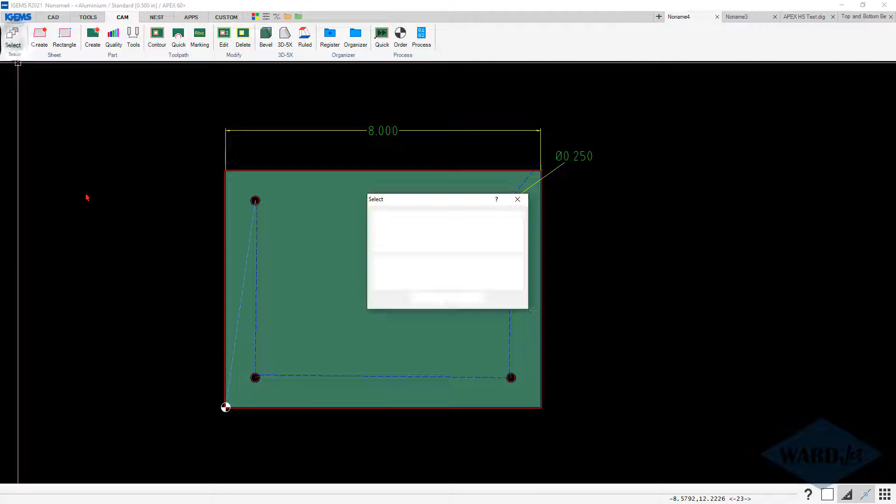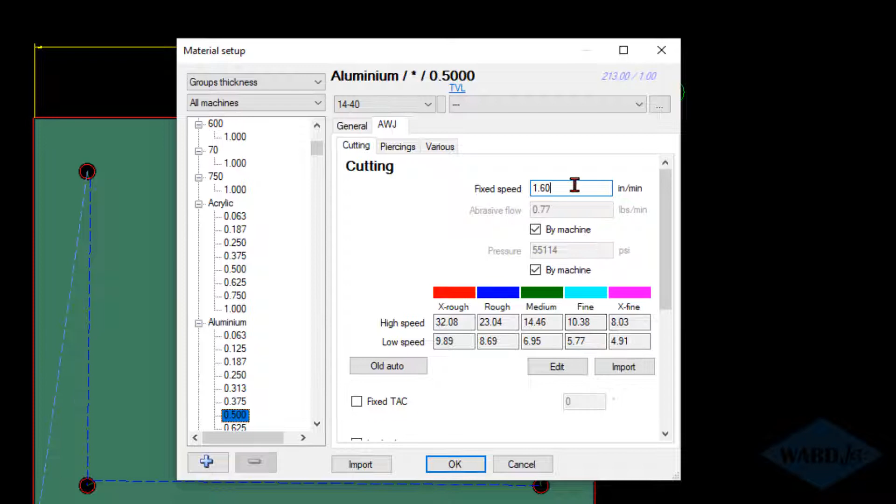If we go into the material and edit the material, we have this fixed speed field up here, which normally is set to 39.37 by default. So what I'll generally do is set this to about 20% of my extra fine speed, and I find that that gives me a pretty vertical cut. As you get thinner and thicker, that ratio might change a little bit, but it's a good place to start in the typical range that people are doing water jet cutting. So this essentially gives you a 6th quality to choose from.

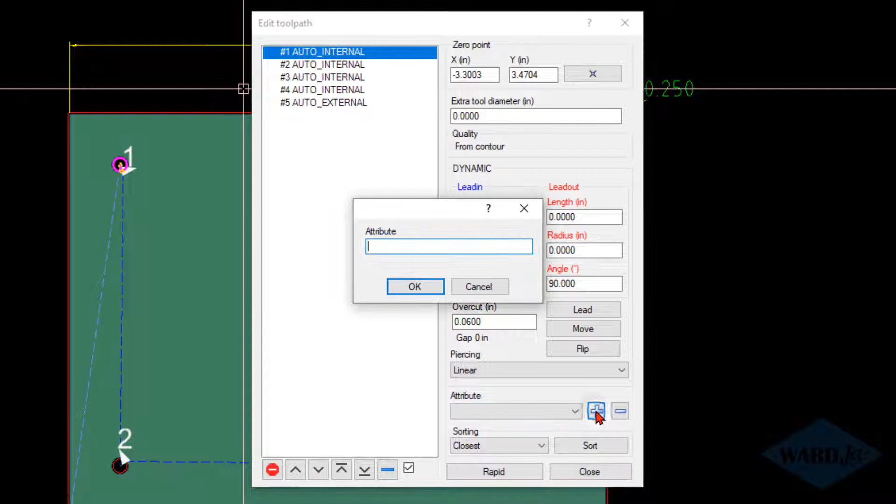And then if you actually want to use that, we've got our toolpath added here already. If we click on the edit button, click on the part, come down to the attribute area, and if it's not already there, which in this case it's not, you can click on the plus button here and just type uppercase FS, and it'll add that to that cut, and then you can do the same thing to the other cuts. So then once it's in that pull down list, you can choose that.

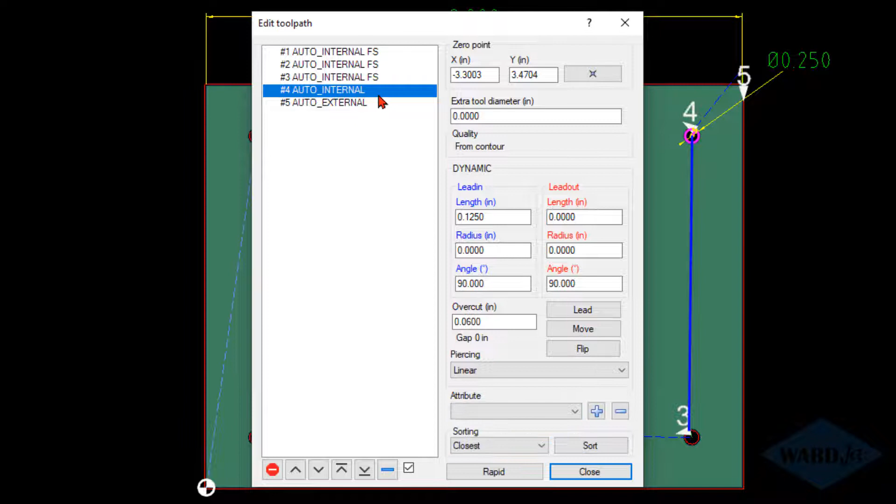If you decide that you want to remove one of these attributes, just hit the pull down menu and click on the blank field there, and that removes that attribute. And then we can, of course, put it back on again. You might also find as you cut these holes at the slower fixed speed that they're going to get a little bit larger because you are traveling so slowly.

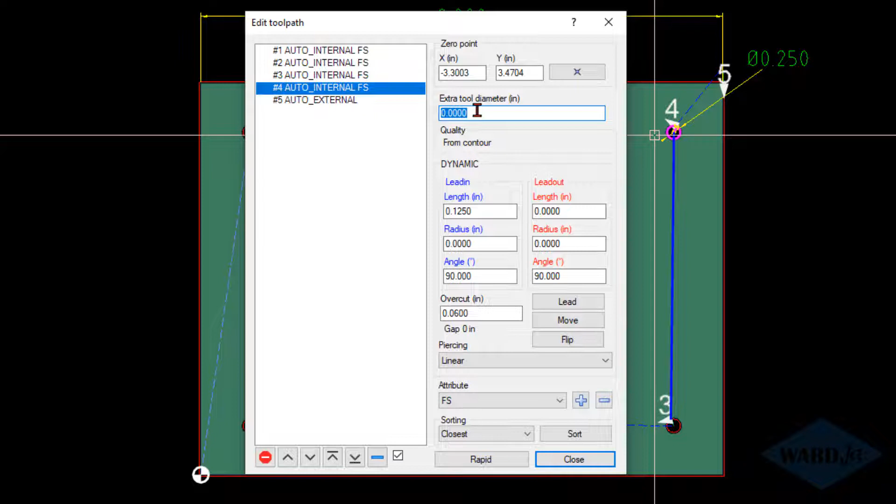So if that's the case, you can use this extra tool diameter field here to increase the tool offset on those holes. So if you cut the hole and found that it was 5 thousandths bigger, you can plug in 5 thou here, and if we zoom in on that hole, see that when I click out of that box, the toolpath moves in towards the inside to make that hole a little bit smaller by that amount. We can close this now. We can process this.

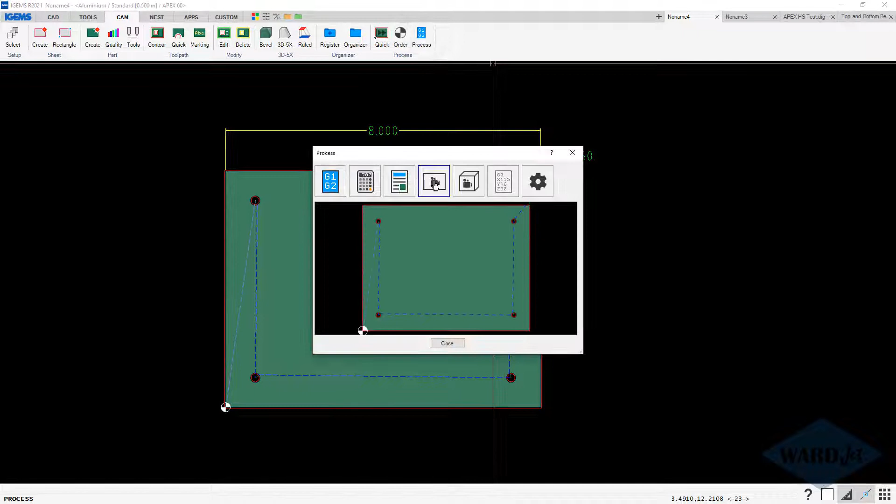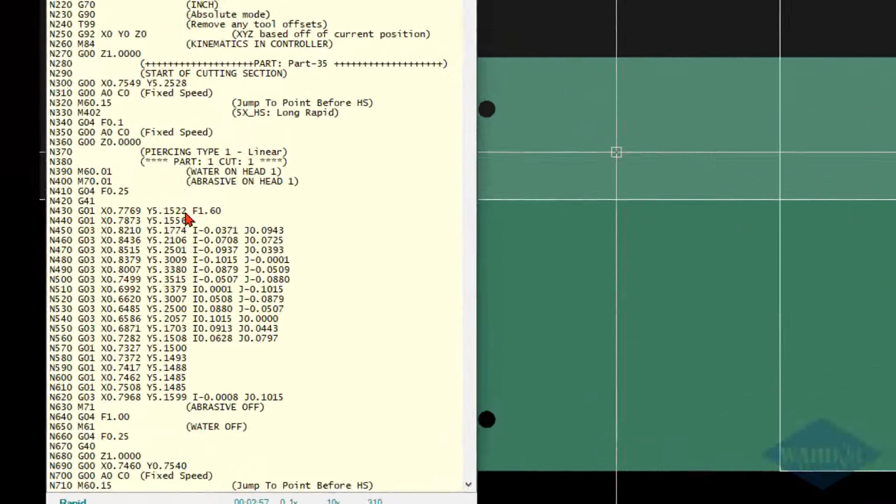It comes up with this little notification here to let you know that you've got a fixed feed rate in your part. If it comes up and says 39.37, then that'll clue you in that you haven't yet gone in there and set what you want to use for your fixed speed. And so now we'll see that it's going to cut this hole at 1.6 inches per minute, and it'll do that for all 4 holes.

So this can be useful for people that don't have a taper angle correction head like the Apex 60. It can also be used in conjunction with the Apex 60 head. You might actually find you get a better quality small hole doing this than sometimes with the taper angle correction. With the ramping and the very slight changes in the A and C axes, again, you might see some little deviations on the back side of the cut, and this can help to smooth it out, and it probably won't take much longer to cut than if you did it with the taper angle correction turned on. So if you have any questions on that, let me know.